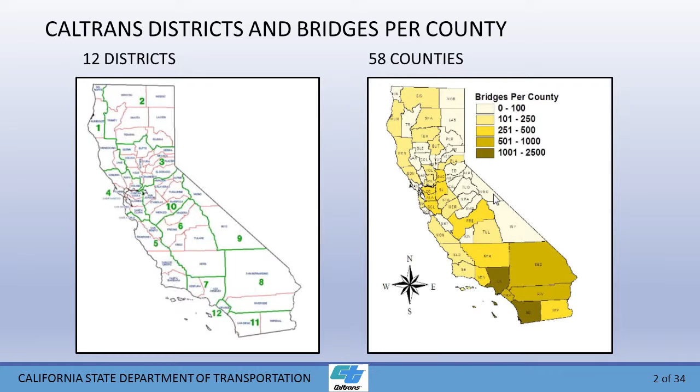To handle this design, there are basically 3.5 maintenance bridge design sections within CALTRANS. I supervise one of them in Los Angeles. There are 2 up north in Sacramento, and a kind of half-sized one in Oakland, just for bridge maintenance design purposes. Overall in CALTRANS, with bridge design, there's somewhere around 22 different branches entirely. It's quite a lot of people.

Statewide ages of bridges are shown here. The average age is about 43. State highway bridges number around 13,000, local agency bridges another 13,000, so we have a total of 26,000 bridges in California. That number is horrendous. The age of 43 average is very significant because from what I've discovered, when you hit 40, the serviceability of the structure starts going down. The tipping point is around 40, and we're seeing some very significant problems with quite a few of these bridges.

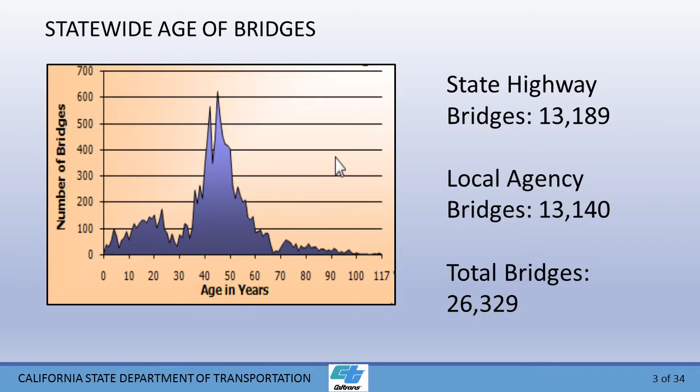This is how CALTRANS spends its money for bridge major maintenance: decks and approach slabs, 51% of the money; joints, about 7%; paint projects, 24%; all others, 18%.

The state highway maintenance program, we call it the 315 program. Last year we spent $146 million. The State Highway Operation Protection Program, or SHOPP, last year we programmed $300 million in projects. That's quite a lot, that's massive. But the SHOPP projects have matching federal funds, while the 315 program is purely state funds. So needless to say, we do everything we can to program as much as we can in SHOPP because we do have matching federal funds.

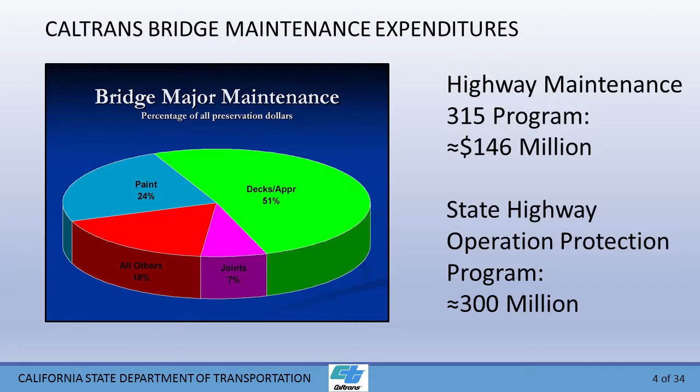The SHOPP projects also include bridge replacements and deck replacements, as well as deck rehabs and joints. I'm going to be talking about 9 conventional joint types within California, the common ones, and 2 seismic joint types that are used within California.

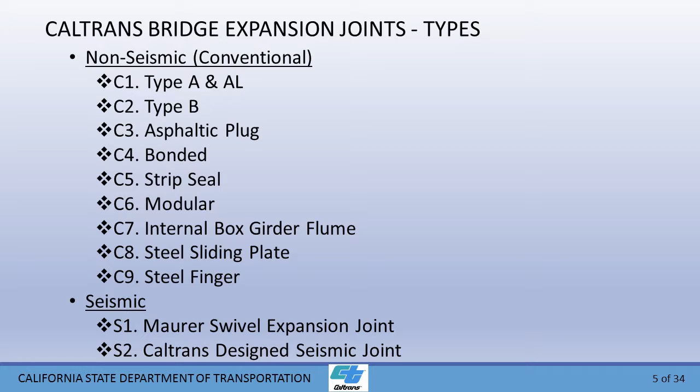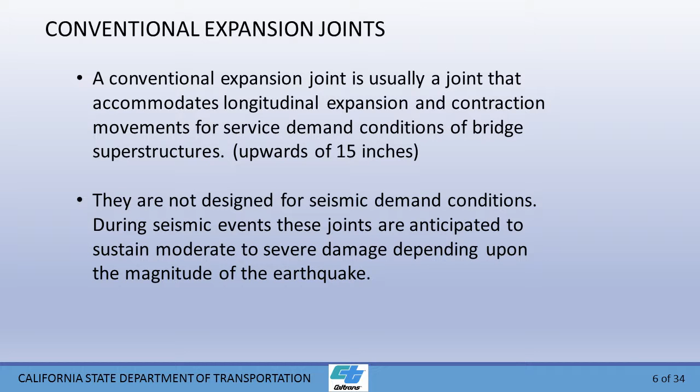I'll start with a definition of a conventional expansion joint. It's usually a joint that accommodates longitudinal expansion and contraction movements under service demand conditions of bridge superstructures, upwards of around 15 inches. They are not designed for seismic design or demand conditions, and those joints are expected to see significant damage in a massive earthquake. Seismic expansion joints can accommodate upwards of 50, possibly 60 inches of movement in an earthquake, and are expected to maintain full functionality with zero to minor damage after a significant earthquake.

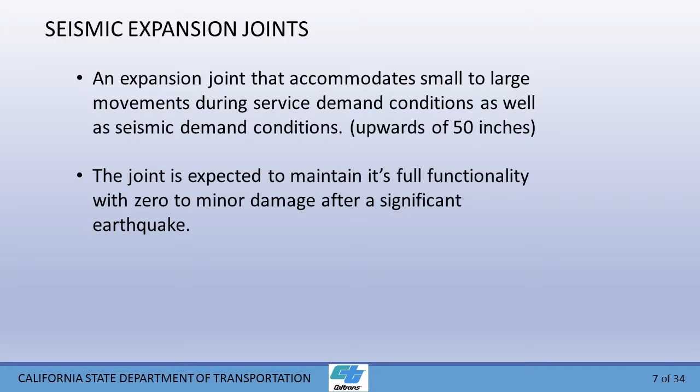Let's go to the conventional joint types. This is a Type A and Type AL expansion joint. The Type A is a silicone seal pourable joint, as you can see on your right, used for transverse joints across the bridge. The Type AL is basically a silicone pour joint for longitudinal purposes.

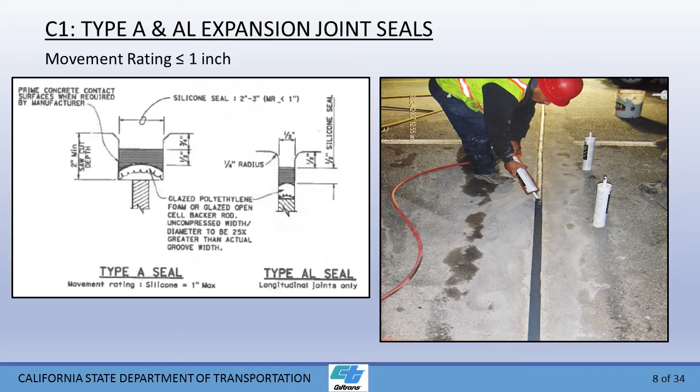Now, what we are finding is that when we repair these joint spalls, and of course replace the joint seals, within a matter of possibly a year and a half, all of the joint spalls, quite a few of them, are spalling off once again. It's a matter, we discovered, of materials, construction, and possibly specifications, but it's becoming a very costly issue in California.

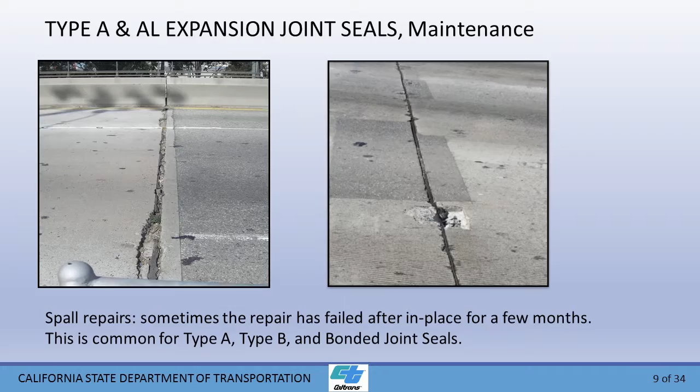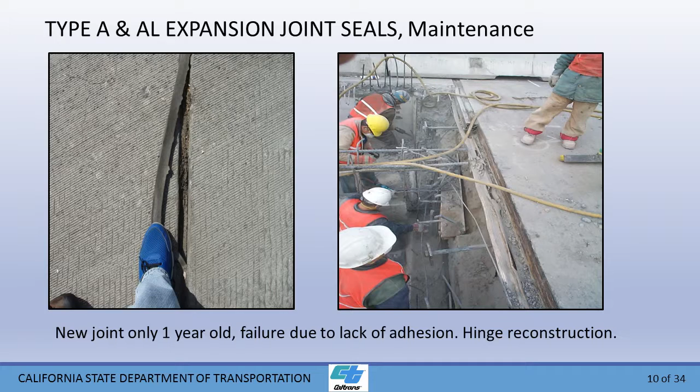So it's very costly to keep these joints replaced and clean. And as a side note, I've noticed in the past 6 years, we're having a lot more complete hinge replacements in California than we have had in the past.

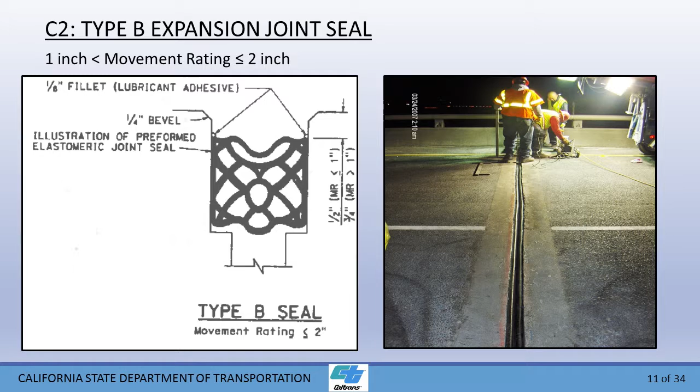This is a type B expansion joint seal, transverse. Its movement rating is less than or equal to 2 inches. It's a preformed elastomeric joint. It's compressed, and then it's squeezed into the joint itself, as you can see on the picture to your right.

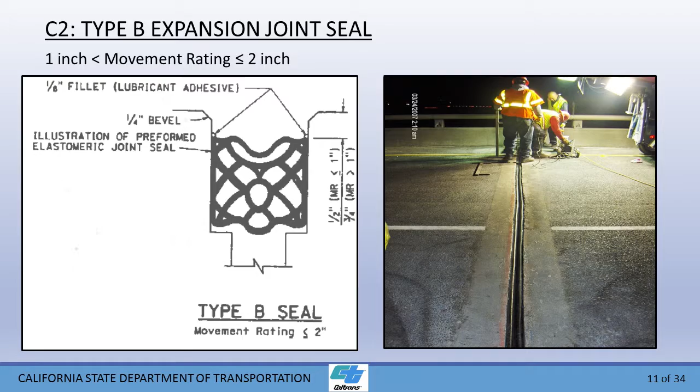Some of the issues we have with maintaining these type Bs. Once again, it's a never-ending joint spall issue. We have armored angles on either side of a joint. The studs that anchor the angles into the concrete fatigue, they break, and then these armored angles come flying off into the traffic. This takes about 35, 40 years to happen.

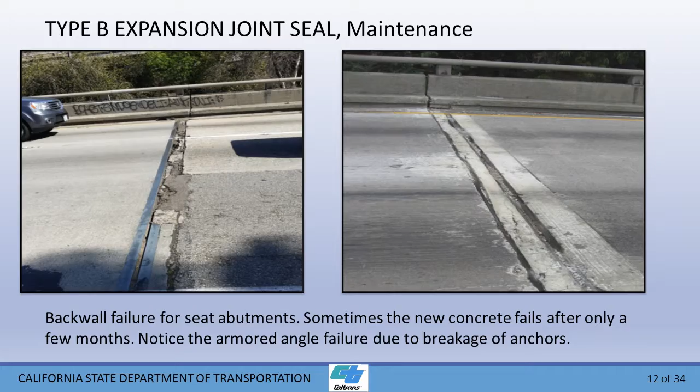And we actually have some bulging in there. In this particular design, we are going to completely rip out that joint, rebuild it with a drill and bond rebar and concrete, and probably put a type B joint seal back.

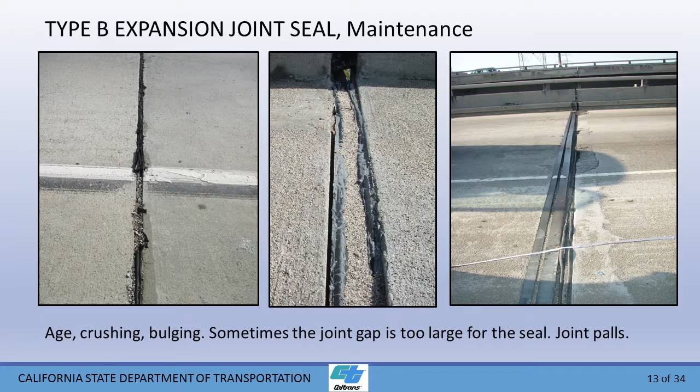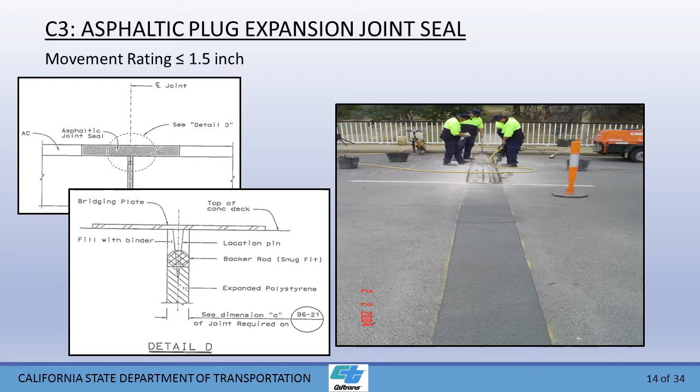Okay, the third type is an asphaltic plug expansion joint seal. It basically has a bridging plate with a location pin beneath it to hold it into place, and then we have asphaltic joint material on top. You can see on the picture on the right, it's being put into place on a bridge, and it happens very quickly, and it's very easy to do.

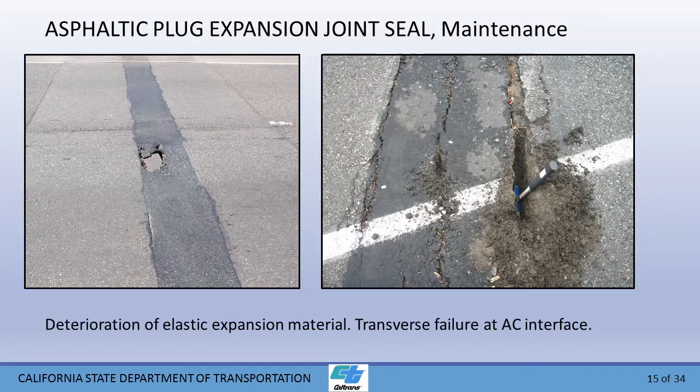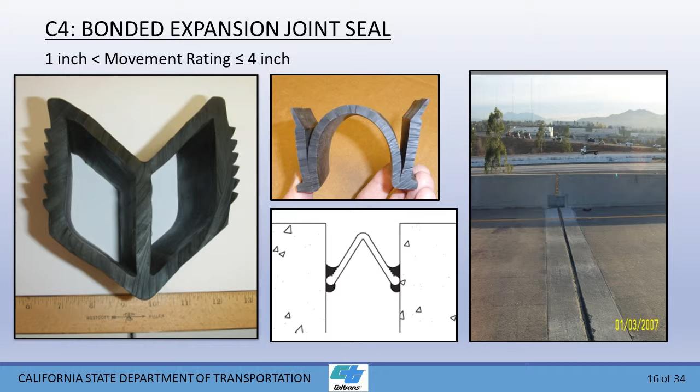This is a fourth type of common joint type. It's common for Southern California, starting in about the year 2006. The picture to your right is the first one we installed down south in 2006, but I shot a picture in 2007. The pictures to your left are the common bonded joint seals. We call it bonded because we bond the sides with epoxy. The picture to your left is manufactured by Watson Bowman. It's actually bonded on both sides with epoxy, then it's inflated with air to help force the joint and the epoxy into the concrete headers.

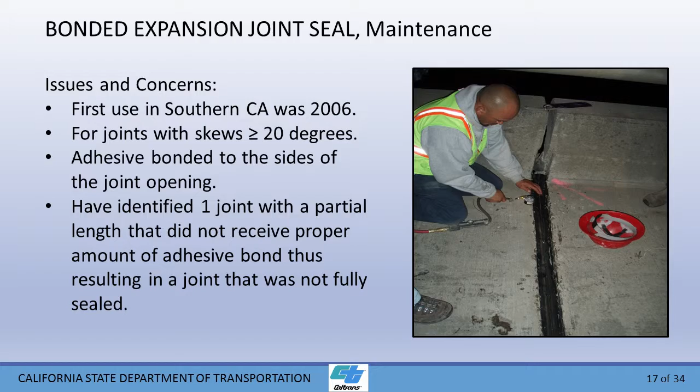Now, the problems we've had so far since 2006 has only been one problem with one joint. It happened where a partial length of that joint had failed. We were able to cut it out, put a new splice in there, and epoxy it back into place. The bonded joint seals are excellent for joints with skews over 20 degrees, because of shear. We continue to use them, and I'm very, very happy with them.

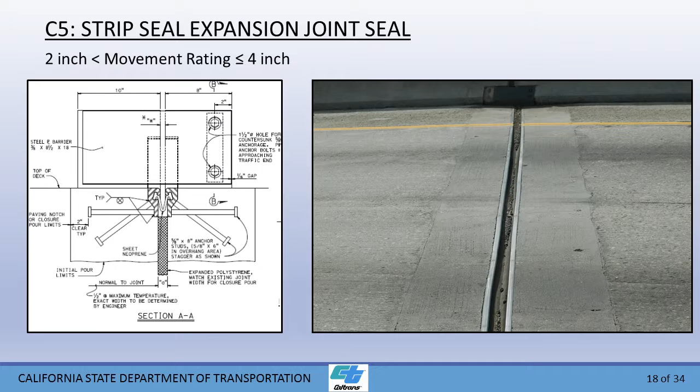The fifth type of common seal type is a strip seal expansion. You can see on the left, we have armored angles with studs holding it into place with concrete headers, and then we have a neoprene gland running down the center. Some of the problems we have with this joint type is the neoprene gland will eventually tear. The material, something else, bulges it down and it tears. That's the most common type of problem we have. Sometimes the armored angles, the studs will fatigue and break, and the armored angles will come loose. We have to replace that portion.

The problem with strip seals, from what I've seen, is that each one is proprietary. We have like 4 different manufacturers, and they all have different neoprene glands for their particular joint type. So we have to go out and sole source it just to the company that manufactured the joint to start with. Sometimes we don't have shop plans in our as-builts showing us who manufactured the joint to start with, so it can be very difficult, sometimes almost like searching for a needle in a haystack, to find the neoprene gland that's to be used to replace this.

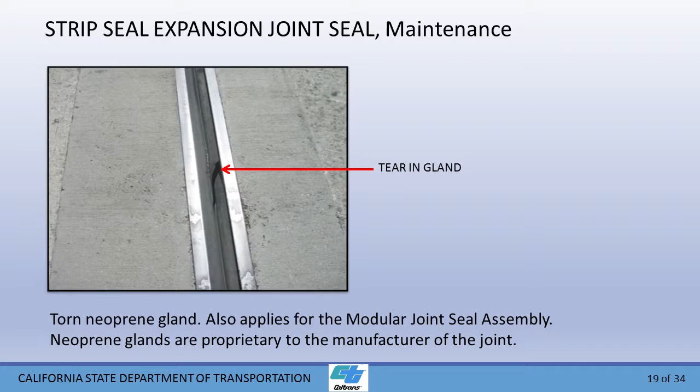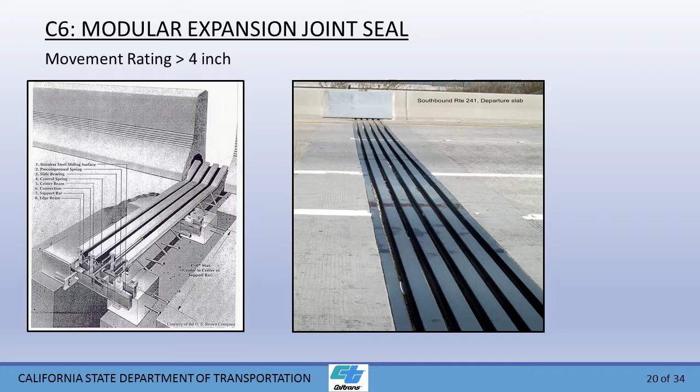The sixth type of common joint seal is a modular expansion joint seal, as you see. You see from the left, there are a lot of components involved. You have transverse beams on top, and underneath it, you have longitudinal beams that expand and contract. The picture to the right is one in Southern California. It's very large, relative to most of the ones I see in Southern California.

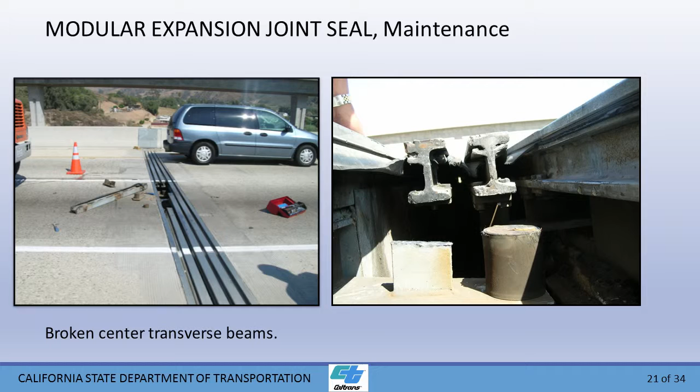This is the problems we have with these joints. The welds start cracking, and they fail, and the transverse beams just come flying off, or else we have a failure of bearing in the longitudinal beams underneath the transverse beams. Once it's failed, the top transverse beams just start flopping around, and before you know it, they break, and basically come flying off into traffic. The picture you see at the right is a typical failure of a weld in these transverse beams.

Typical, or I should say some of the failure modes we have with the modular joints: spalling and failure of the concrete headers, fatigue of welded connections, shop and field splice of the center beams. We have control spring failure - that's one of the components beneath the joint. We do have poor workmanship in construction, and we do have excess concrete dumped into the joint opening.

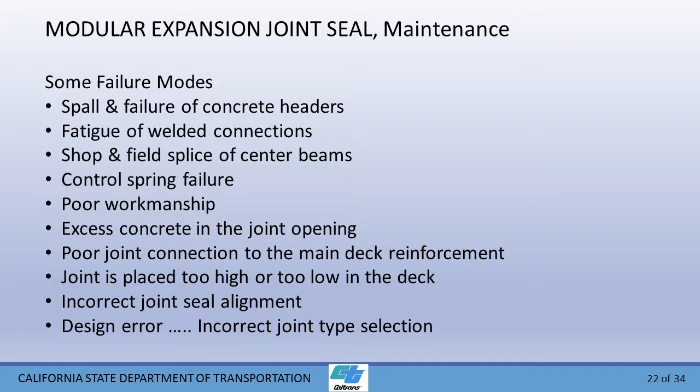When we build the joint, we put expanded polystyrene in the joint, and sometimes it's not there. When they pour the concrete header on the sides, they just dump concrete right into the joint, and lo and behold, the joint is frozen up and locked. We have a poor joint connection to the main deck reinforcement. The joint can be placed too high or too low. We have an incorrect joint seal alignment, and sometimes there is a design error - we select the wrong joint type for the application.

Now this is a very interesting type of joint seal that I wanted to bring to your attention. This is an internal box girder flume.

If you take a look at the picture to your left, this is a cross-section of a cast-in-place box structure. One of the cells serves as a storm drain channel. There's no piping in there, it just flows with water, storm water. And the joints at the abutments are what you see at the right.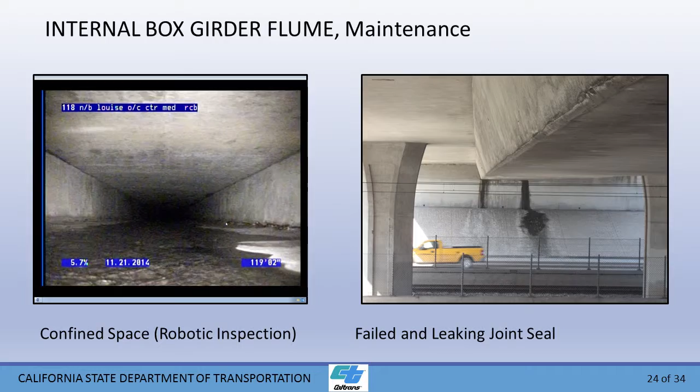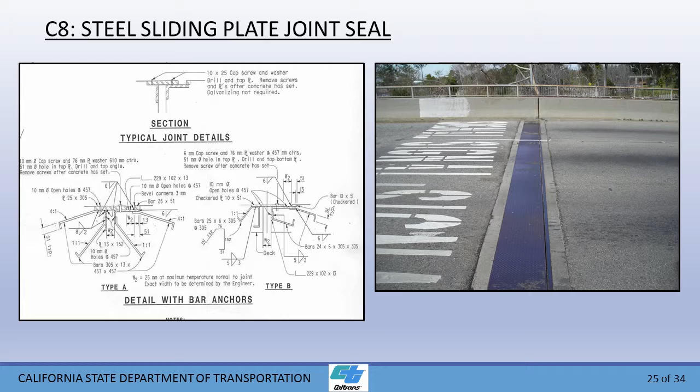This is the C8 type. It's a sliding steel plate joint seal. We don't use these anymore for new bridges, but they are still out there in the inventory.

This is some of the problems we have. As I've mentioned before, the armored angles, the studs snap, and then the angles come flying off into the traffic. So when this happens, we don't even bother to try to repair that. We just rip it out, grind the bond concrete, put a type B or maybe a type A, and just replace the whole thing.

And sometimes that movable gap in the top of the steel plate just gets filled with debris of every kind, so the bridge joint is not serving contraction and expansion anymore. And sometimes it gets paved over with AC, and the gap is just filled in with AC, so it doesn't function any longer.

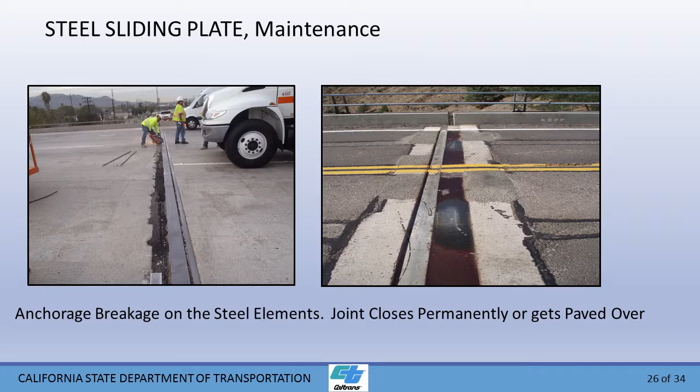Okay, type 9 is a steel finger joint for very large movements. We have a few of those down in Southern California.

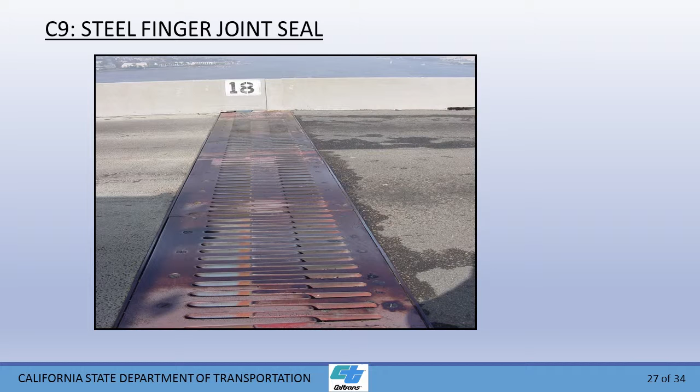Some of the issues we have: the fingers will break, they come flying off. Those bolts will break as well under live load fatigue, and then the fingers come flying off because of broken bolts, or maybe entire sections. If you take a look at this joint, it comes in sections. Those bolts holding it down, sometimes they snap, and the whole section of the finger joint just comes flying off into traffic.

And then the joint type to the right is from the Vincent Thomas Bridge, Long Beach, installed in 1963. I don't know what they were thinking at the time, but now that's a deadly hazard to bicyclists. We're now in the process of trying to do an upgrade or repair on that. At the time, I guess in 1963, bicycles weren't considered important or part of the traveling roadway.

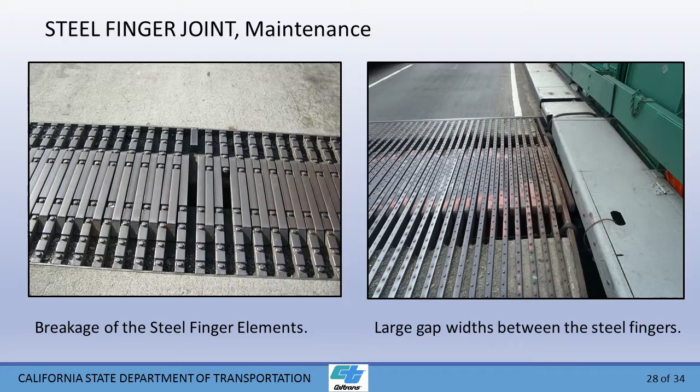Okay, off of conventional joints, let's go to seismic joints. This is a MAURER swivel expansion joint. The picture to your left is actually taken in Seattle. It is a relatively new bridge. You can see this is a monster-sized modular joint. And from the diagram to the right, it's got a lot of moving parts and a lot of components.

From my practical experience, and I don't mean to slander any company, the more moving parts you have out there under live load, the more maintenance problems you can expect to have. We currently have 3 bridges in California that have this joint type: the new Carquinez Suspension Bridge in the northern part of San Francisco Bay Area, which has a total of 50-inch movement for seismic; the San Francisco Oakland Bay Bridge, brand new one, the Skyway; and the Hillery Drive Overcrossing in San Diego County.

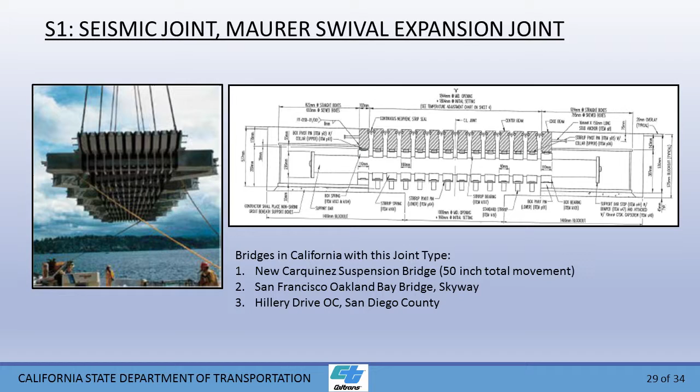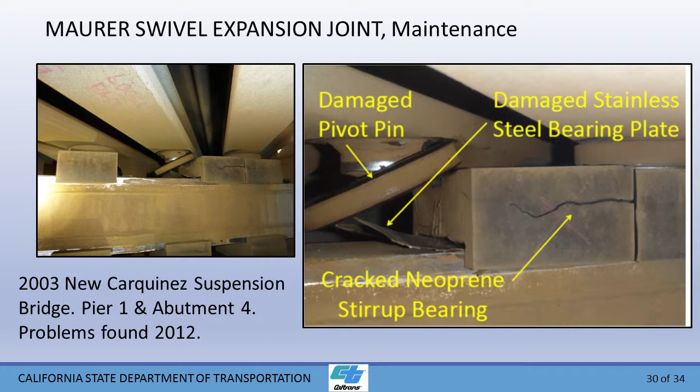Some of the problems we've started experiencing already with the new Carquinez Bridge, built in 2003: at Pier 1, abutment 4, problems were found in year 2012. You can see from the pictures to the right, it looks like the neoprene stirrup bearing moved to the right, the bearing was lost, and there's cracking. So a contract was issued back in 2015 to keep the joint, but just repair it.

Okay, the last joint type I'm going to talk about is special, in-house to California. This is basically a bolted steel plate on top of a deck.

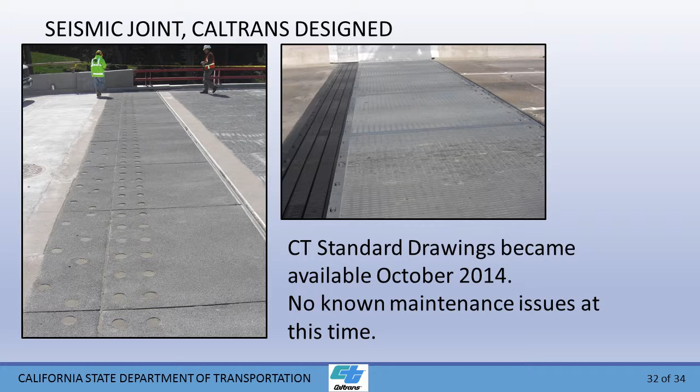The standard drawings became available in 2014 with CALTRANS, so it's relatively new. These are some pictures of what we have out there right now on several bridges. I may go back one.

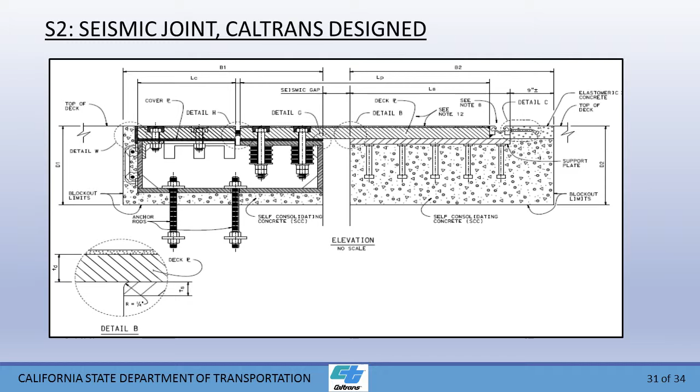The top wearing surface is a multiple layer polymer. And we know over time, with wheels of traffic, it's going to wear it. So we know we're just going to grind off where those wheel strips are and just put it back. So we know how to mitigate that issue. And I know that's going to become a maintenance problem that we have to deal with in the future, but we can successfully mitigate it.

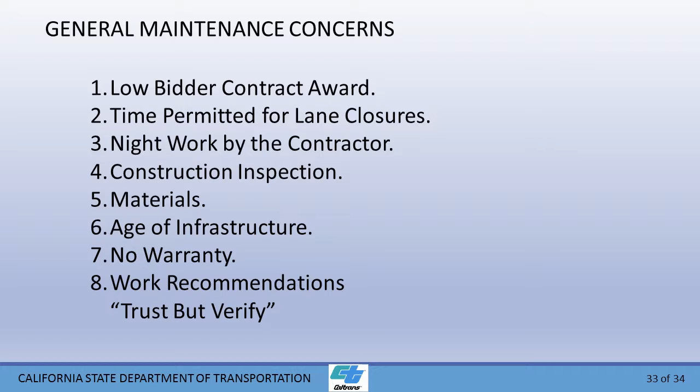Okay, my second to last slide, some of our general maintenance concerns. Now, I don't mean to slander any contractors here, but generally speaking, the contract goes to the low bidder. And the low bidder is undermining everybody to get the bid, and he plans on making his money back. He does that by sometimes cutting short corners and sometimes coming back at us with CCOs. Not all of them do that, but we do have issues there.

Time permitted for lane closure: to do the work in these heavy urban areas of Southern California, we only have lane closures or traffic windows of 6 to 8 hours. So it's all done at nighttime, which means limited visibility, and it means the contractor, the person doing the job, may be on his second job. He's got one in the daytime, now he's got one at nighttime, and he's tired, and he may not be doing his best. And then because we are in tight windows, we have to use rapid strength concrete almost everywhere.

Construction inspection: Caltrans personnel in-house are not quality control personnel, they are quality assurance personnel. The contractor is supposed to provide quality control. Sometimes they do, sometimes they don't. Quality assurance means that sometimes the Caltrans inspector simply isn't there on site. And on top of that, we have a low bid contractor wanting to cut corners, and it can be a real mess.

The materials, rapid strength concrete, sometimes it works, sometimes it doesn't, depends upon our specifications, the materials used, and the contractor's knowledge of how to use it.

The age of the infrastructure, we're talking about an average age of bridges of 43. The tipping point I've discovered is around 40. So if you take a look at a type A joint seal, replace it every 10 years, it should have been replaced about 4 times now. Type B can last 20 years, so it should have been replaced maybe twice now. And we start seeing significant problems with decks as well at the year 40, anywhere past that point.